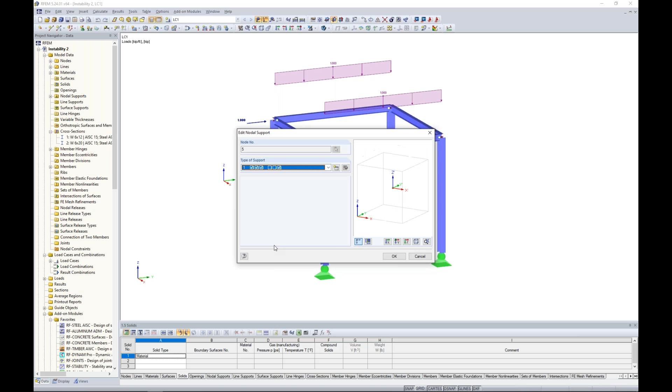You'll see down here at the bottom, we have these nodal supports. These pin type supports are defined here within this dialog box, and you can see we have 6 degrees of freedom, 3 in translation, 3 in rotation. Notice for this pin support, I restrained the translation according to the global X, Y, and Z axes, which we can see here. But I've also restrained the rotation about the global Z axis. So this just doesn't allow that column to freely rotate about its own axis for torsion, for example. So we restrain that here as well.

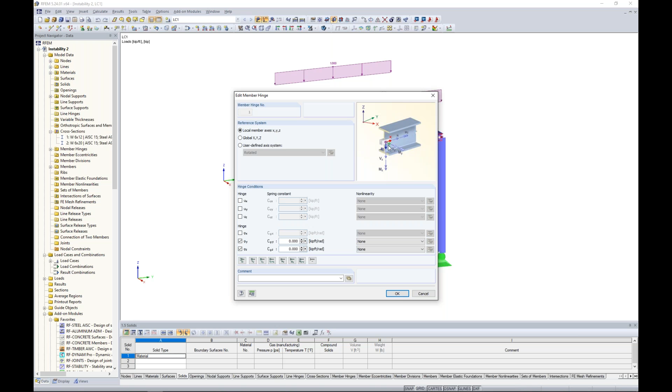Now, when I look at my beams at the top here, you'll notice that these are just typical beam type structures, but they are defined with a member hinge. As you'll notice here, I have released the rotation about the local Y and Z axes, denoted by lowercase X, Y, and Z, and we can relate it to this picture. But I have not released rotation about that local X axis, so that's going to prevent this member from freely rotating about its own axis with this pin member end release. Taking a look at our simple loads that we've applied: distributed loads up here on my front and rear beam, and then a couple of point loads to essentially apply a lateral load to this structure.

So this is under a particular load case here. And when we go to run this load case, according to just a simple linear analysis, we're presented here with our first instability.

I'd like to encourage you that when instabilities occur, especially within RFEM, to really read this text that's given to you here. We really do our best just to try and point you in the direction that the instability can be resolved. So when we read this, we see that the structure is unstable.

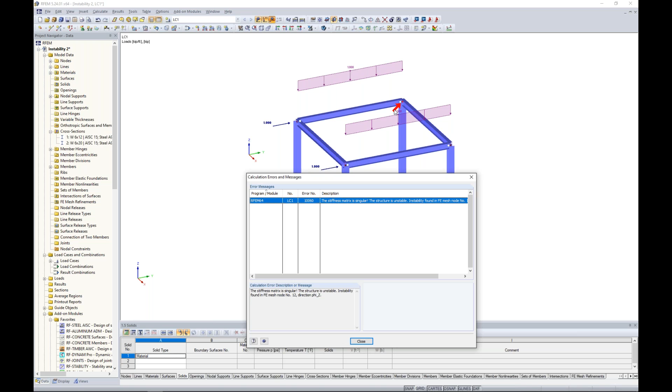The instability is found in FE mesh node number 12. And if I drag this down, we can see that red arrow kind of pointing to where that instability could potentially occur. Not always will this red arrow be helpful in troubleshooting exactly where the issue is, but often it can be used. And the instability is occurring in direction phi z, which is rotation about my global z axis.

So I can close out of this dialog box, and we might be thinking, okay, well, we've restrained these pinned supports down here to restrain the rotation about the global z-axis, so that couldn't be an issue. My member end releases are defined okay. So we might be thinking to ourselves, okay, well, maybe there's a modeling issue.

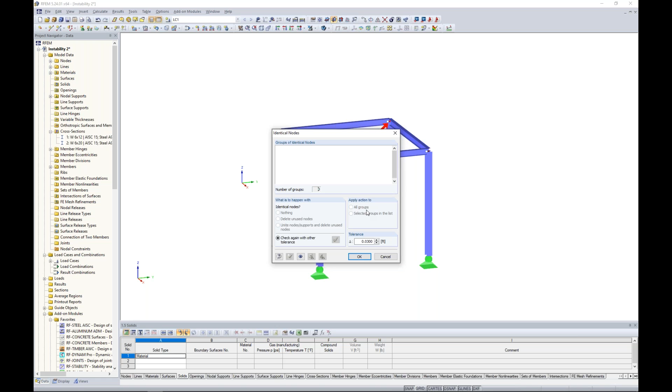Well, under tools, we can go to model check, and you'll notice we have a few features here to help us troubleshoot potential modeling issues such as identical nodes, overlapping members. If we take a look at identical nodes, we can set a tolerance and the program will actually list the groups of identical nodes here. But you can see for today's example, that's really not an issue.

So if I've exhausted all of my possibilities trying to troubleshoot just graphically looking at the model, this is where we want to utilize our add-on module RF stability. So over in the left, the project navigator, I can launch this add-on module. And what this allows me to do is to run a general eigenvalue analysis on this structure for general stability design.

I'm going to specify the lowest number of eigenvalues, that's just the default. Now the eigenvalue analysis is linear by default, but we also can run a nonlinear analysis if we choose to. But here's the problem. When we try and import the axial forces here from load case number 1, and we click calculate, the program gives us a warning saying that the results are not available. The reason why is because we cannot run a general static analysis in RFEM with this load case, so there's no way that we can run an eigenvalue analysis here.

Well, this is where we would want to activate this checkbox down at the bottom where we can determine the eigenvector for an unstable model so the cause of the instability can be checked graphically. And notice this is now grayed out, we're not utilizing this load case or combination.

So now when I click calculate, what you'll see here is we're presented with these results tables, eigenvectors by node and eigenvectors by member. But really what's most helpful is if we just immediately jump to the graphics view. These are going to be my results from RF stability, running that unstable model.

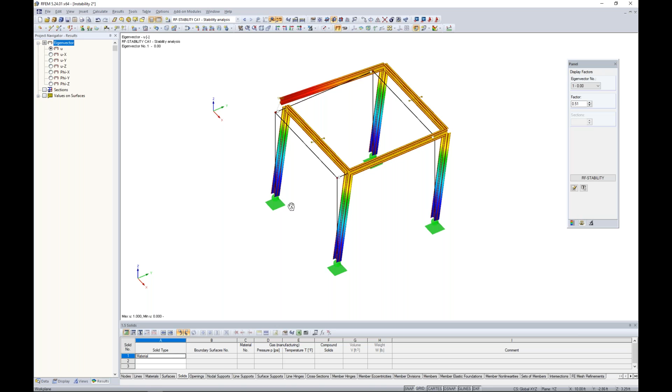Maybe I turn this to wireframe view here. And when I rotate the model around, I think we can clearly see what the issue is. And I can even show animation here of RF stability. We see that this member is not connected to the rest of the structure, so it's free to move about that global z-axis.

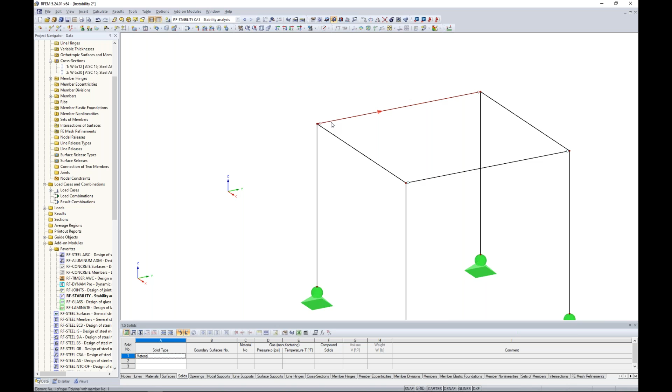So what we'll do is to turn off the results here. And if we zoom in quite a bit, well, sure enough, these two nodes aren't connected. And we might be asking ourselves, well, at what point is the program going to automatically mesh these two node points together? And that does exist within the model.

Under Calculate FE Mesh Settings, there's an epsilon value here. And this epsilon value, if we go to the full precision, is set at something pretty small, 0.003 feet. So this is the default setting, and you certainly can increase this, but you really need to be careful because if you set this to something too big, you're going to begin to merge nodes together during the calculation that really aren't meant to be merged.

So we'll leave this as default because clearly this distance is much greater than 0.003 feet, and all we need to do here is just grab this node and snap it to that column. Okay, so hopefully we've alleviated this instability. What we would do now is jump back to load case 1, remember with those same applied loads, and we'll begin to run the calculation.

So I run the calculation, and sure enough, I have another instability. Now the instability is found in FE mesh node number 83, and I can see the red arrow pointing here. This arrow's along the member length, so maybe not much can be going on there, so maybe it's not so helpful in this situation, but it is in the direction Y. That's the error message given to us - translation direction Y. So again, I've troubleshooted this model looking at it graphically, but I don't know the reason for this instability.

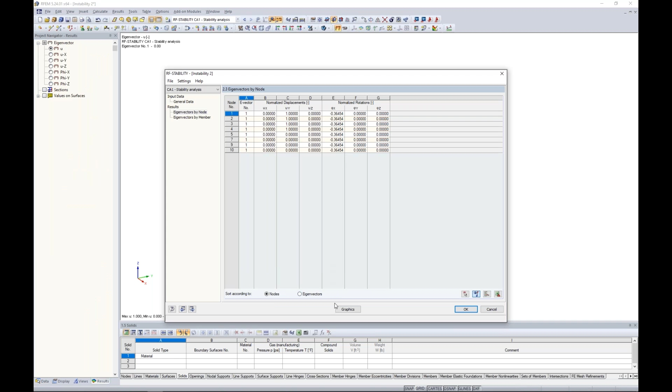So we jump back to RF Stability, and once again we have to keep this option checked because we are not able to solve this simple load case back in RFEM. So we calculate it again here, just like what we previously saw with that unconnected node. We take a look at our graphics, and realistically we can see what the issue is here.

We have all of these nodal pin supports defined down here at the bottom, and we have the moment release for our two beams at the top. So we have all these pin connections, but we have no lateral stability to this structure. You can see RF Stability is telling us clearly the entire structure is going to fail - we apply this lateral load, and it's just really going to hinge to the right side here. So how do we alleviate this?

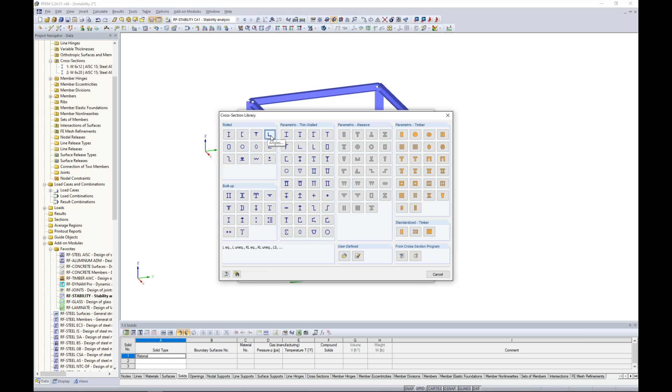Well, we would just need to add in some lateral bracing. So we can go in to draw a new single member, and we access our cross-section library, and we'll choose a single angle here. Now, utilizing my filters on the left, we can choose a single angle of 3.5 by 3.5 by 3/8 from the AISC.

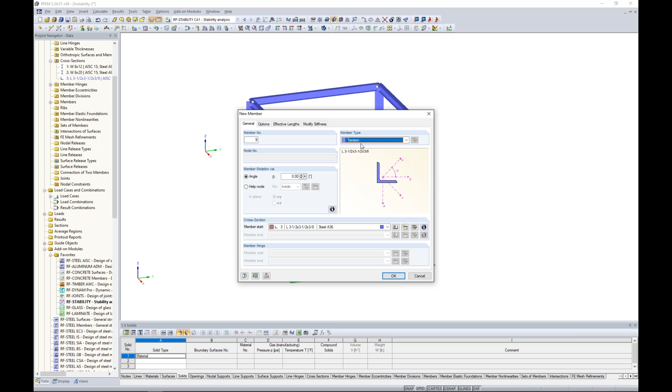Maybe we want to create a new material here, so we access our material library. Again, utilizing the filters on the left, we can choose steel A36 from the AISC standard. I click OK, and the member type here would be set to tension only. The benefit of this tension-only member is that when this member experiences compression, it will be completely taken out of the model, but in a subsequent iteration, if tension is reintroduced into the member, it will be reactivated. This is because RFEM is a nonlinear analysis program, so it can activate and deactivate this member all within the same calculation.

So I click OK, and what I'd like to do here is snap from the bottom point to the top point here. Now our hope is that we go back to this load case and once again try to run the calculation, and sure enough, we are presented here with our results. So hopefully this was helpful troubleshooting on basic instabilities, utilizing that add-on module RF Stability to help us.

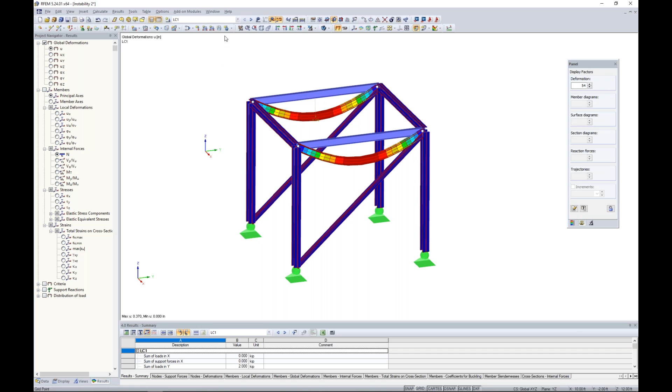So going to our next structure here, an example, definitely a more complex system. This is a previous structure I took from a webinar. If I change the display here, it will be quite clear - a timber structure, curved glulam members. I did the design according to the NDS standard, so you can certainly refer to our website or YouTube channel if you're interested in more of this.

But as we can see, typical glulam beam members here, and if I change my view here to the member type, I've defined truss elements in between these larger beams, and the truss just means that we're going to apply a moment end release at either end here. Then I have some tension-only members defined here with my X bracing, and these are just going to be cable elements. Then of course at the front and rear of the structure, we just have these small columns defined here.

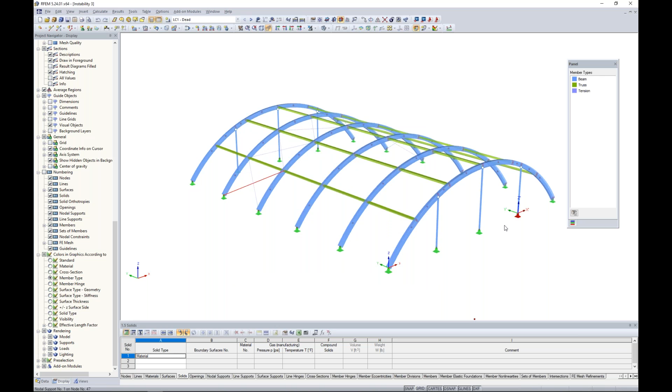So looking at my load cases, I have a dead load applied here - you can see uniform load applied across the top of my members. We have point loads applied to the top of the columns, and we also have a pre-stress applied to these cable elements. Looking at my next load case, we have a balanced snow load according to the ASCE 7, and then load case number 3, an unbalanced snow load.

Well, when I combine all of these into my load combination, you can see here load combination number 2 - it's combining those dead loads along with the balanced snow load. And I'd like to run this calculation here.

So we will run the calculation. I click OK, and the program will run through this nonlinear analysis, and we are presented with yet again another instability. But notice that my text looks a little bit different this time. It says the model is unstable, and the instability is found in FE mesh node number 94, so we can see exactly where that's pointing to.

But this time the program tells me it's in the direction phi x, rotation about the global x-axis, but the specified load is greater than the critical load. It goes on to tell us to utilize RF Stability to help troubleshoot. So how would I approach this?

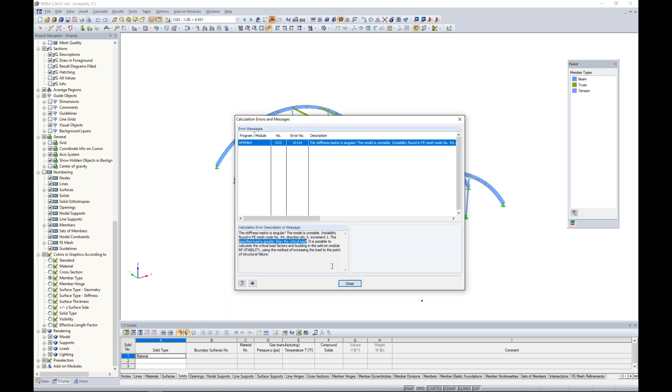When we're seeing issues related to critical loads, the first thing to do is jump up to our load combinations. By default, all load combinations are run according to a second order analysis. Let's just change this to a first order analysis, click OK, and try and rerun the calculation. Now, if you cannot run according to a first order analysis, the first thing we should be thinking is we probably have a modeling mistake somewhere.

But in this instance, the program runs okay. The other thing to check is, do we have any crazy deflections? If you see things flying off the page, there's probably some type of modeling error when the deflection according to a first order analysis is pretty large. But in our case, if I decrease this deformation factor and look at our total, it's 0.4 inches. So really nothing too wild going on here.

So why can we not solve according to a second order analysis? This is where we would jump to RF Stability once again. The difference here is that I no longer need to utilize this checkbox, but rather I can select load combination 2 from my dropdown, because we were able to get it to solve in RFEM, according to a first order analysis.

So we run a linear eigenvalue analysis, and what will be presented here is our critical load factors for our four different buckling modes. Dragging this down and taking a look at my four different eigenvalues, I think we can see clearly what the issue is: these slender columns at the front and rear of the structure.

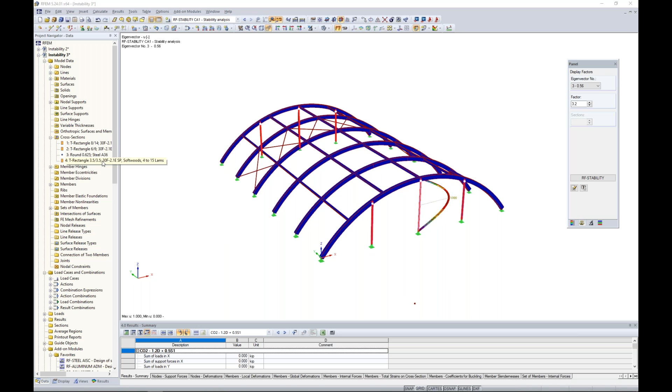So how do we remedy this? We can jump to our graphics view, and if we're curious to see those different buckling mode shapes in a little bit more detail, we can do so within our control panel. So I'm going to go back to the project navigator under my data tab to take a look at my cross sections. My slender columns here are very slender—I can double click on them and you can see they're only 3.5 inches by 3.5 inches.

So maybe we edit this, and instead we're going to use 5 inches by 5 inches. Same material, I don't need to make any modifications there. So now we're going to see slightly higher stiffness with these increased member sizes.

So then what we'd like to do is go back to our load combinations. Load combination number 2, we change this back to a second order analysis, because the hope is that this now solves according to not only a first order analysis, but a second order analysis. And sure enough, we are able to get results, and we can see that our total deformation is only 0.4 inches. So everything looks pretty good there.

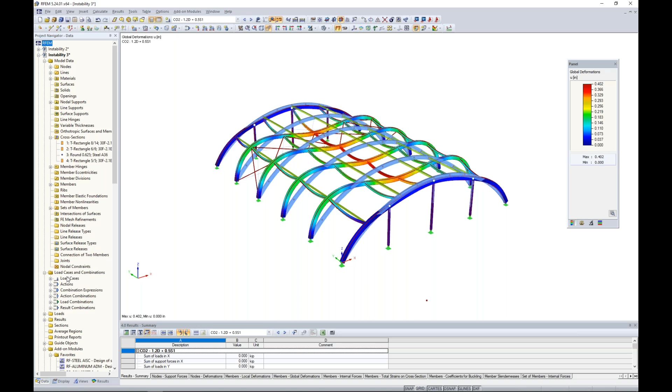And we might be curious to see, what does RF Stability look like once we've increased these member sizes? We're still importing load combination number 2, but remember now this is according to a second order analysis—that's fine because it solves back in RFEM. And here we're presented with critical load factors of 2.2.

So it looks like our initial buckling mode shapes for this structure would still be related to these slender columns, but now the structure can handle 220% of the loads from load combination 2 before we see any type of failure behavior related to buckling. Again, incredibly useful to utilize this add-on module RF Stability here.

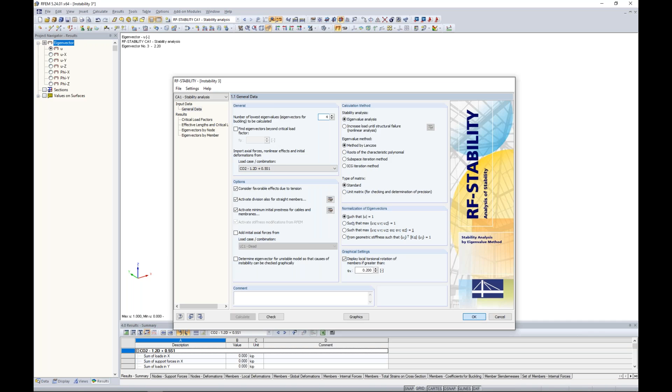Jumping to the last instability example, the first two examples were related to members and 1D elements such as beams and columns. But instabilities can also happen with surfaces. This was a previous model I took from a 2-part webinar series on plate and shell modeling within RFEM, and we have a typical tank type structure here.

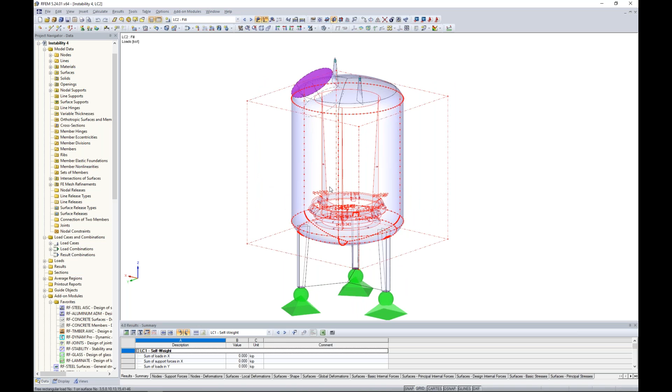Taking a look at my applied loads, our first load case is just self-weight, so no additional loads are shown here. Then we have our fill load, which is an internal load pushing out on the structure walls. And we have a wind load, which includes an uplift from the bottom and also a lateral load coming from the left with a suction force on the right-hand side.

So taking a look at my load combination where I've applied all three of these load cases together, we'd like to begin our first analysis. So I'm going to start the calculation here, and similar to what we've seen previously, we get an instability. Let's try and read this information to give us more information about what could possibly be going on.

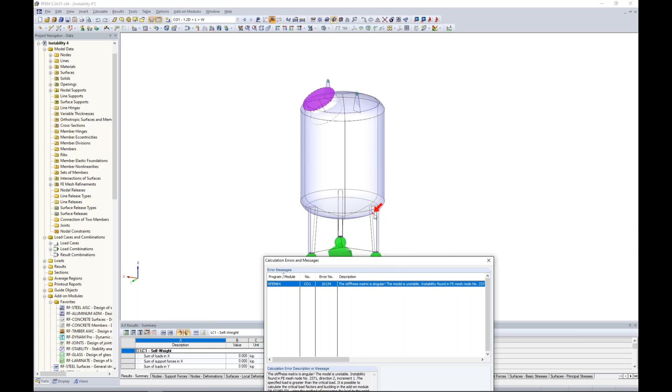So we have an instability in FE mesh node 2371. Looking at it, it looks to be at the top of this leg, the bottom of the actual body of the tank. This time it's in the Z direction. We'll have to look into that a little bit further, but we still get that same error that the specified load is greater than the critical load.

So once again, I'm going to take the exact same process that we just saw for our member elements, but it also can be applied to surfaces. We go into load cases and combinations, and under calculation parameters, instead of running according to a second order analysis, we change this to a first order analysis, and it's our hope now that we're able to see the calculation run.

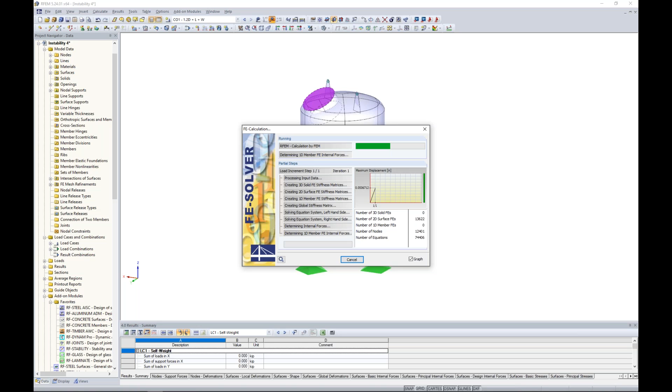And again, if we're not able to, then let's begin checking for duplicate members, duplicate nodes, unconnected nodes. Maybe we have the wrong units defined for our loads. So many different scenarios here. But in this particular case, the model solves great for a first order analysis.

If I decrease this deformation here, we see the total deformation is only 0.05 inches, so relatively nothing going on here.

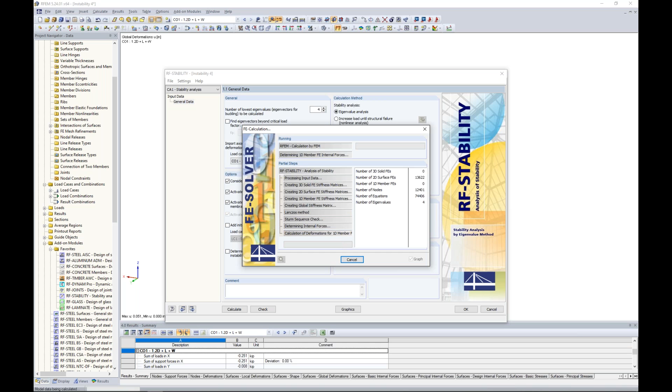So we go back to our trusted RF Stability, and we are going to import load combination number 1, because remember, we do have the ability to solve for that back in RFEM, so we do not need to utilize this option down at the bottom. We click calculate here, and notice this will take a split second longer than what we saw with our members, because we've introduced many more FE mesh points into the model than what we previously had with the members. But eventually we are presented with our results, including the critical load factor.

So when I move this down here, I think it's quite apparent what exactly the issue is. It looks to be buckling of these leg elements here, and again we're seeing values less than 1.0. So the program's telling us we can only apply 67% of the loads from load combination 1 before we're going to see a failure such as this one.

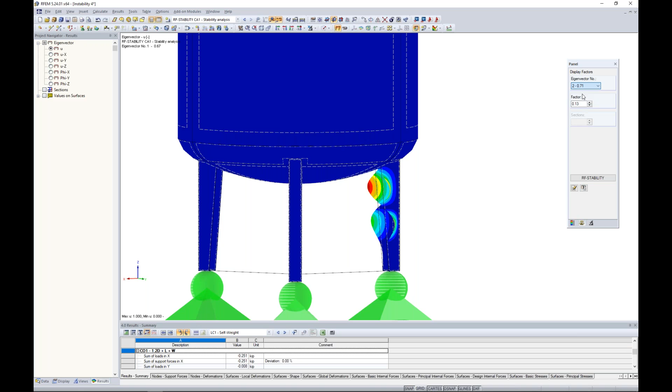So going back to the graphics view here, maybe we turn this to wireframe view to view this in a little bit more detail and more clearly. Again, we can scroll through to these different mode shapes here, and again they're all related to this leg element.

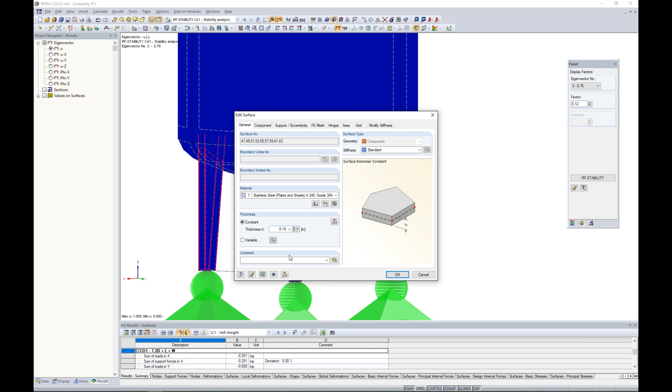So what I can do is highlight all of these elements, right click to edit the surface, and we'll notice that our thickness is only 0.04 inches. So this is probably not sufficient in this case. We definitely need to increase this. So let us try 0.14 inches instead. I click OK.

So again, we jump back to our load combination and change it back to a second order analysis, because it's our hope that this model will solve not only for first order but also for second order. And sure enough, we're presented with our results now. Just by increasing the thickness of those legs, we've alleviated the buckling issues that were taking place.

So again, RF Stability can be used not only for member elements, but really we can troubleshoot the stability of surface elements as well. We'll move on to the next topic. That's quite a bit with instabilities, but hopefully you learned something here. Definitely take a look at the text given in the error message and use RF Stability to overcome those issues.

So I mentioned in the PowerPoint a very common question: what size should my FE mesh be for my surface elements in order to give accurate results? That's a good question, and it's not easy to answer for every model because it really depends. You'll notice here I have 5 different surfaces, and they're actually all identical.

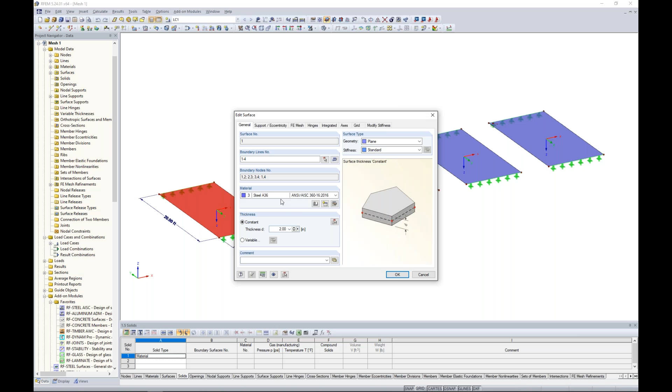If I double click on one of these, it's just steel A36 material, 2 inches thick. Looking at our support conditions, we have line supports defined on either side - a pin type support with restraint in translation on one side, and a roller type support on the other. For this initial load case, we just have a 0.1 distributed load, 0.1 kips per square foot on every surface.

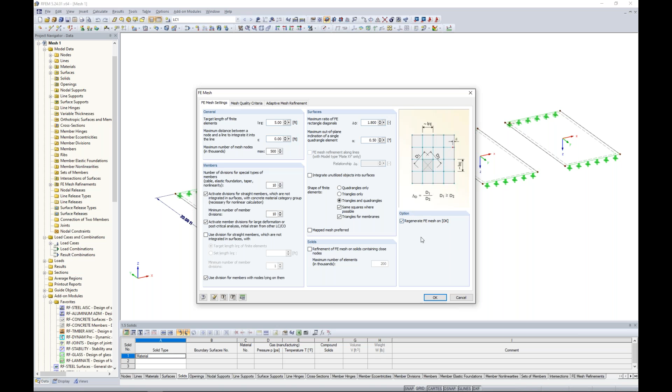So if we turn this to wireframe view, let's begin with our global FE mesh settings. Under Calculate, FE mesh settings, we can set the global mesh here, and you can see I've set mine to 5 feet. When I click regenerate FE mesh and click OK, let's take a look at our first surface here.

This is going to abide by that global FE mesh of 5 feet, and you'll notice a very coarse mesh - we only have 2 elements across the width. I can tell you this is definitely not ideal. The only place we're getting results here within the program after we run the analysis is at every FE mesh point. Definitely not adequate, much too coarse.

As we move on down the line, you'll notice I've added FE mesh refinements. You can add an FE mesh refinement about any element by highlighting it, right clicking, and selecting FE mesh refinement. In this case, I set the refinement to 2.5 feet, about half of the adjacent surface. I continued by adding an additional refinement of 1 foot. My fourth surface has an even smaller refinement, 0.25, about 3 inches. And finally, we have a very refined FE mesh at 0.1 feet, a little over 1 inch.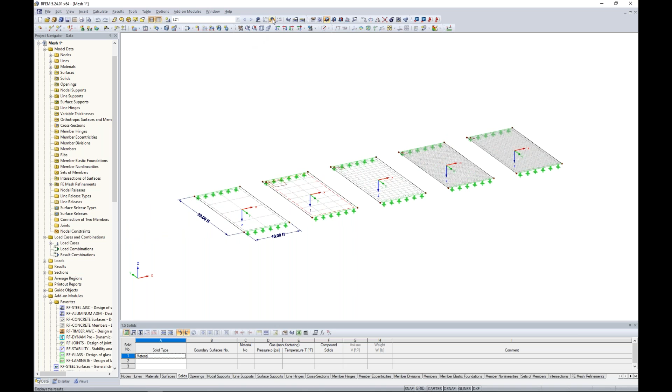So it might be interesting for us to compare results for these distributed loads. We're going to run the analysis here. Let's take a look at, I'll turn off my sections here, the initial deformation. Just primarily looking at it, nothing too drastically different here, though I'm sure we'd get some different values. But I think the biggest telling difference is to take a look at the internal forces.

Let's begin with our MX forces. I've set my contours according to every FE element, and you can see that bending along the local y-axis of the surface, in the length direction, is drastically different as we move down this line. This coarse mesh is much too big - we're not going to gain accurate results here. When we look at the MY forces, same concept - comparison of this first surface versus the last couple is very different.

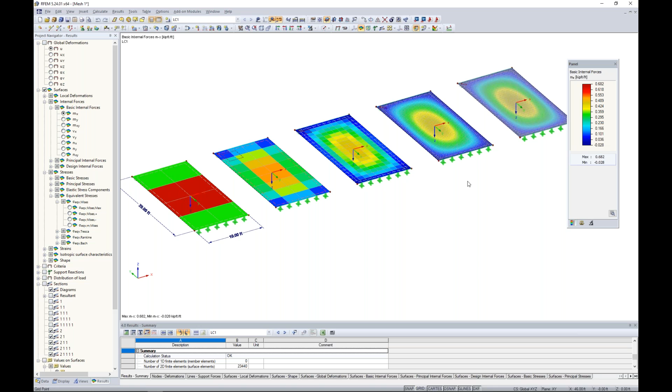Now we can compare section cuts as well. What I've done - I'll turn on these sections and turn off my ISO band so it's easier to see - is made a cut right down the center of these surfaces. Under my display tab, let me also turn on how those cuts were made. I'm currently looking at the MY force, again along the length, and you can see how the diagram of this section cut changes.

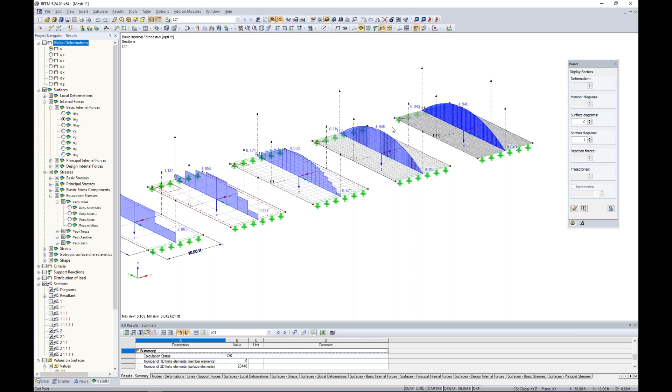For example, these two elements here, this one has about 1/3 the FE mesh on the left than it does on the right, but yet our results are only changing by 0.001. So it's kind of this happy medium, finding the right balance of when we refine our FE mesh to gain accurate results, but not too much so that our calculation time increases significantly because we've added all these additional elements.

Now we can also view the same concept with our MX forces, and I'll turn on my diagrams in the other direction of my section cuts through the surface. Same thing. You can see that this diagram here is definitely not what we'd like to see, but as we begin to move down the line, we're seeing a little bit more realistic behavior here.

But again, take a look at the max bending forces: 0.479 kip feet, 0.472, 0.47. So very little difference when we're looking at some of these surfaces towards the end here with an increase in FE mesh. So I would argue that maybe the second to the last, or possibly even the third to the last, depending on your structure, is adequate for gaining accurate results while not waiting forever for your solution to run.

Now, how do we check this for our own structure? Well, we can just manually refine the mesh, run the calculation, take a look at our results. Let's rerun the calculation with a more refined mesh. Are our results drastically changing? Yes. Well, then we need to continue refining until we get to a point where the results are not changing much, and then we can probably move forward with our static analysis.

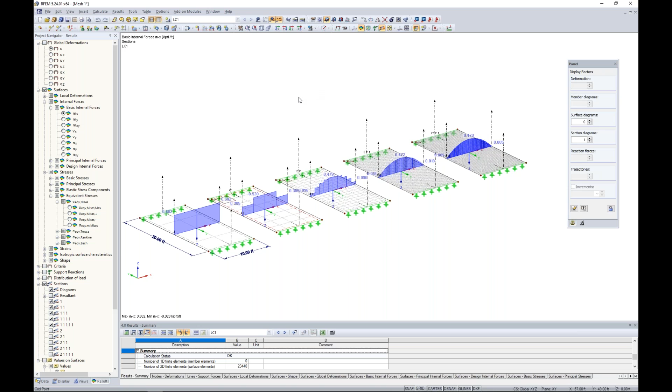So to put this into practice for a real life structure, we'll jump to our next example. This is the FEA model of a connection. We have a beam splice here with two HSS members, and this is utilizing a contact solid. A contact solid allows these two plates to fail in tension where the bolts will take over, but yet in compression we'll see full force transmission.

But definitely a much smaller scale here in terms of our FE mesh. So turning this to wireframe view, if we go to calculate FE mesh settings, typically for a new model, the default mesh size is 1 foot or 12 inches. So if we move forward with this 12 inches and regenerate our FE mesh here, I think we can see that this is absolutely not correct. There are some portions of this HSS sidewall that don't even have a single FE mesh point across the width. So this is definitely telling us that we really need to refine this FE mesh to get multiple elements across this width in order to get accurate results.

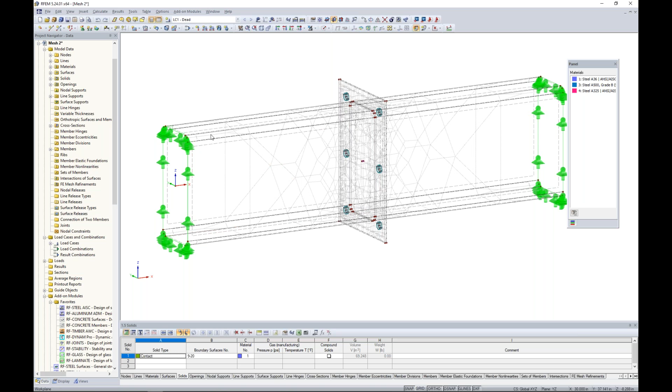So under calculate FE mesh settings, let's change this instead to 1 inch, and we'll regenerate the FE mesh, and I click OK. Now you can see that this looks incredibly better. Now, the program is still intelligent enough, as you saw with the 1 foot mesh, that it will still tie together the nodes and the line elements despite the large FE mesh. So we don't need to take care of any of that manually, but we definitely needed to refine the FE mesh for the surfaces out here.

Now, there may be situations where we want to further refine the FE mesh, and again we can utilize those FE mesh refinements. We just right click on this line element, and we can add that FE mesh refinement here, so you can manually do that. Now, there is a helpful tool within the program that essentially will do all of this manual work for us when it comes to the FE mesh. So under calculate FE mesh settings, you'll see here adaptive mesh refinement. Well, what does this tool do?

We can turn it on here and select any load case or combination we'd like from our dropdown. In my case, I only have one load case defined. We set an average error tolerance here, which I'll just leave at 0.1%.

The program will start with a pretty coarse mesh, as you can see on the right. It will run the analysis, then refine the FE mesh, and compare the results from the previous iteration. It continues to do this until the results aren't changing within 0.1%. So it's actually doing what I described earlier for manual refinement - taking a look at your results - but this does it automatically for us.

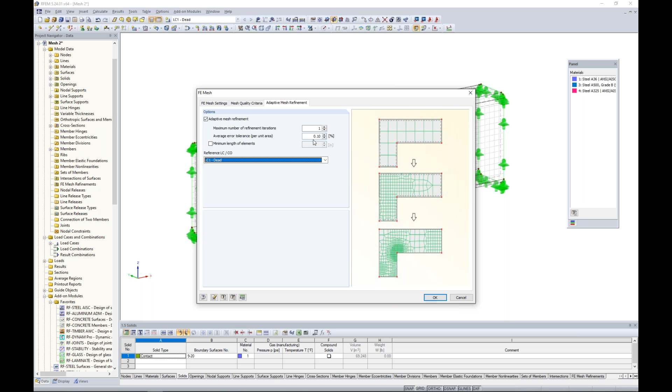So when I click OK and click calculate, generate FE mesh, it looks like it's almost running a calculation, but it's actually determining the FE mesh for us.

Once this is done calculating, what will be presented is the refined FE mesh. You can see a larger FE mesh at some of these HSS surfaces, but when it comes to the plate around our bolt openings, or curved portions closer to our line support, we'll see a more refined mesh. This is going to be the ideal mesh to continue moving forward with our static analysis.

So again, you can either manually set that global mesh and add in your own FE mesh refinements if you'd like more control, or you can utilize this adaptive mesh refinement within the program to have the automatic mesh set for you.

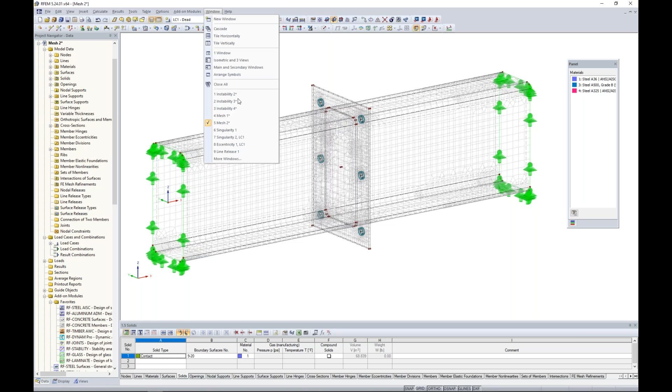This brings us to our next topic, also related to surfaces and somewhat to FE mesh: singularities. Singularities really happen in every FEA program. We experience these high peak stresses and internal forces that just aren't going to occur in real life, but they're inevitable in FEA software. This will be a good example of why they occur.

Looking at this concrete structure on a much larger scale, we have a 2D surface for our slab - 4,000 PSI concrete, with thickness set at 10 inches. We also have columns framing into this slab from underneath, and these columns are 15 inches by 15 inches. But the problem is when we turn this to wireframe view, and this is the case with any FEA software, members are represented by this one-dimensional element.

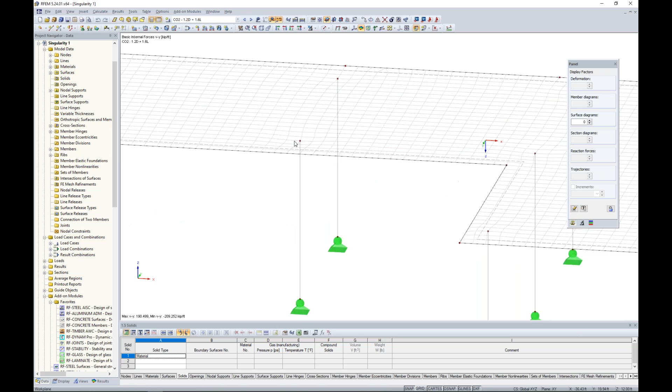And it's framing into this two-dimensional surface at this single point here. So all of the force transfer is taking place at this single FE mesh point, and this is a result of why we get singularities where we don't have real load distribution.

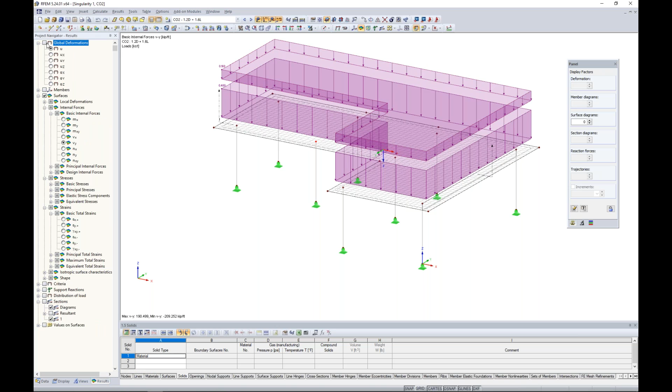For this example, I've applied a couple of gravity loads here for dead load and live load. If we run the analysis, which I've already done in this case, and take a look at our results, we'll turn on our ISO bands and turn off our loads. Okay, the initial deflection - nothing too strange here.

But let's take a look at the internal forces for our slab element. We'll turn this on and look at MX. Initially, MX looks okay - obviously we're seeing some positive bending moment between these column supports. But then there's the case over the columns where we're seeing extremely high negative bending moments.

And of course there will still be some negative bending, but these look pretty high at these locations. MY shows the same concept - positive bending between where these columns are spanning, but very high negative bending moments where it frames into these single 1D member elements. And even more so can be said about the shear forces.

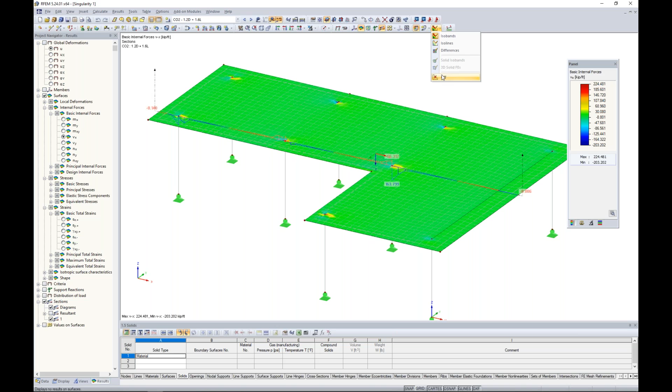We fully expect shear forces to be higher at these column locations, but I've also made a section cut through my structure that I'll turn on, and maybe turn off my ISO bands. If we look at this section cut, you'll see these shear forces are very high - from negative 66 kips up to 163 kips, all at this single point location. So there's got to be a better way to distribute the forces over that entire portion where the column frames in, because in real life it's not represented by this single line element.

This is where we'd like to add what's called an average region. Under the project navigator, we can find average regions listed here, and I can right click and choose new average region. It's exactly as it sounds: we're going to average out the internal forces over a set width and length, and this will be presented to us so that we can overcome these high singularity forces.

One other thing I forgot before we do this: before you place in those average regions, let's think about the FE mesh. I'd also like to refine the FE mesh around these singularity locations. I think it's best to isolate these high peak forces into an even smaller area, and we do so with an FE mesh refinement.

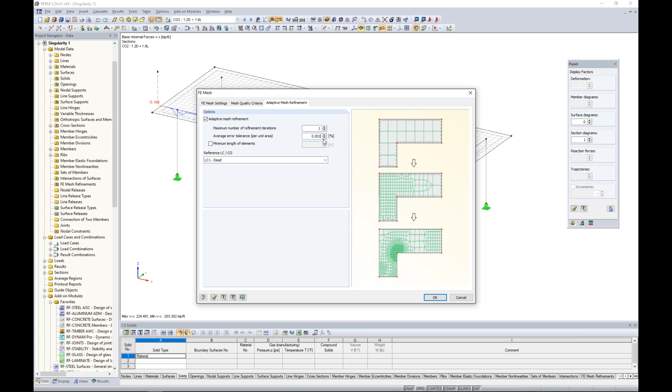We can right click on that node and add in a new FE mesh refinement by creating a new refinement type. But remember, we can also utilize, under Calculate, FE Mesh Settings, this adaptive mesh refinement once again, just to get the ideal mesh refinement. In this case, I'm going to set this percentage value much lower so I can see some refinements about these columns and such.

So under Calculate, generate FE mesh. Let's take a look here. Here's the initial coarse mesh in the background, and eventually we have these nice FE mesh refinements, especially around our reentrant corners and our columns.

Now let's jump back to the average region. We right click on the average region to create a new definition type. As I was saying, it's going to average out these internal forces over a set dimension. Now we can choose the surface we'd like to apply it to, so it'll just be surface number 1, only one surface here.

I'm going to place the average region at the top of this column, so I graphically selected it. We choose the shape, so it can be a rectangle, and we choose the dimensions. Now, what's the correct dimension for an average region? This all depends on your model - it's up to the user's discretion on how big to set this average region.

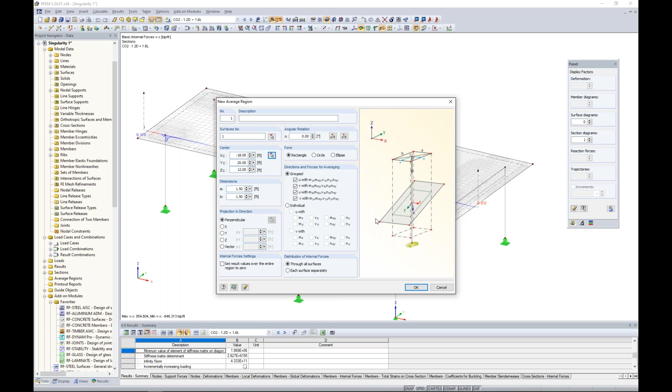So now when I click OK, you'll notice that immediately the high peak force is gone because we're averaging it out over this entire area shown with that blue symbol. I can take this average region, hold down my control key, drag and drop it to my next column location, and you'll notice that peak is now gone. Let's continue with this third column, and now we're seeing those high peak stresses are eliminated.

Not entirely, because we do want to see some shear, of course, at these locations. If we right click along this section cut to view our results diagram, this will give us a little more detail along the length here. I'm going to turn on MX, MY, VX, VY, and we can clearly see where that average region was applied - it's flattened out along these internal force diagrams.

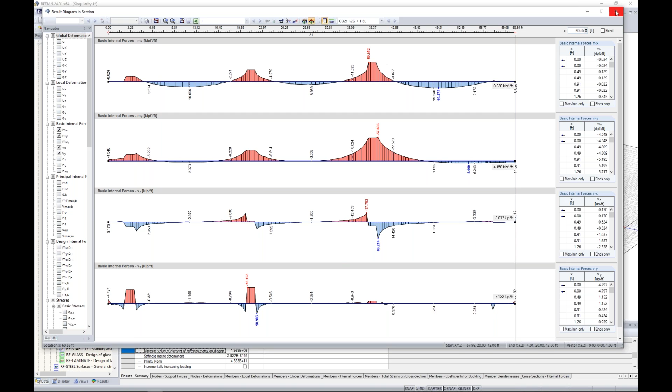So average regions can definitely be helpful in overcoming these singularities. They can also be applied in the design add-on modules such as RF Concrete Surfaces, where we design the reinforcement for this element.

Well, these average regions can also be considered directly within the add-on modules. So moving on to our next example, also to deal with singularities, there are situations where maybe average regions don't help in certain scenarios.

For this particular case, we have a shear wall or gravity loading wall with 4,000 psi concrete, 6 inches thick. There's a simple gravity load applied, a distributed load at the top, and I've applied a couple columns framing into the bottom. These columns are quite compact, 2 feet by 6 inches.

But regardless of the dimensions of this column, when we turn this to wireframe view, we'll still see that these members are represented by single line elements framing into this one tiny FE mesh point.

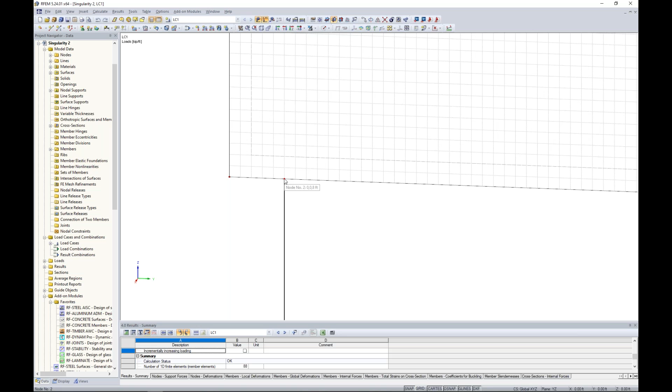So when we take a look at the results from this first load type, and we're currently viewing the deformations, we zoom in to look at them. Well, this definitely is not ideal. We know that this column has a pretty wide width of almost 2 feet, so we wouldn't expect deflection such as this.

Then if we take a look at our internal forces, let's look at NY forces, compression and tension in this wall. We have extremely high peak forces here, those singularities. We're seeing compression here at 454 kips. This is definitely not ideal.

So how can we see better load distribution over this area? This would be a situation where average regions could be helpful, but I think there's a better approach here, and that'd be to apply a rigid element for load distribution.

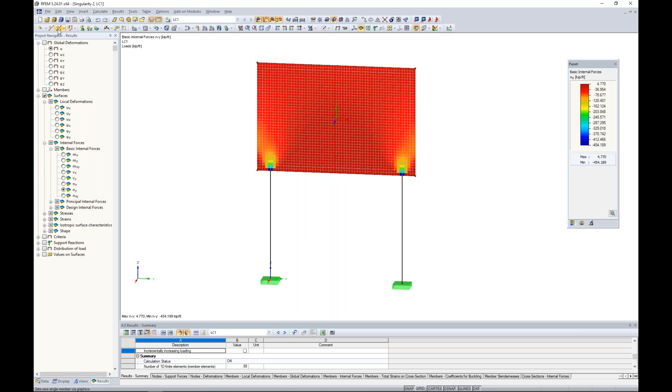So we'll go into draw a new member. Under the member type, this is where we're going to choose rigid. With a rigid element, you'll notice you can't choose a cross section or material because it's just going to be a very, very high stiffness element. So we'll click OK. It's asking me to clear my results.

I'm going to zoom in here, and I am going to snap from the top of my column 1 foot to the left, and snap from the center of the column 1 foot to the right. So there's that rigid element. This is going to represent the full 2 foot width of that column.

Remember, if we turn this to a rendered view, this is kind of what we're helping here with the load distribution. I'm going to take these 2 rigid elements, hold down my control key, and after they are selected, I can drag and drop and copy them to the other side.

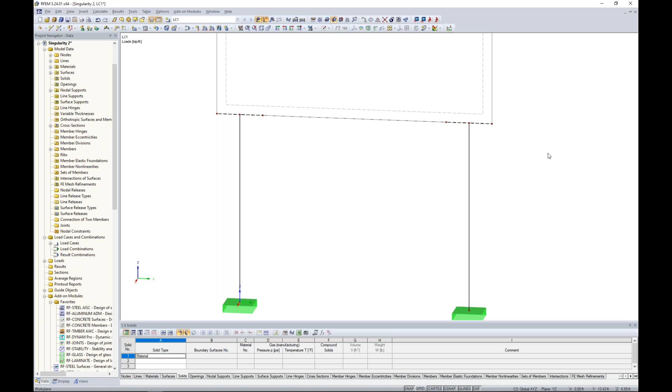So let us rerun this same calculation just to see how our results will vary. When we take a look at our global deformations, this is definitely something that looks much better. We kind of have a straight deformation line at the top of the column due to those rigid links, but we're still going to see downward deflection spanning between the columns.

Let's jump back to our internal forces, in particular those tension and compression forces. You can see now we're seeing high tension forces at the bottom here, and some compression forces more towards the top. This is exactly what we'd expect. Previously, we had those singularity points that were kind of overtaking all of the internal forces.

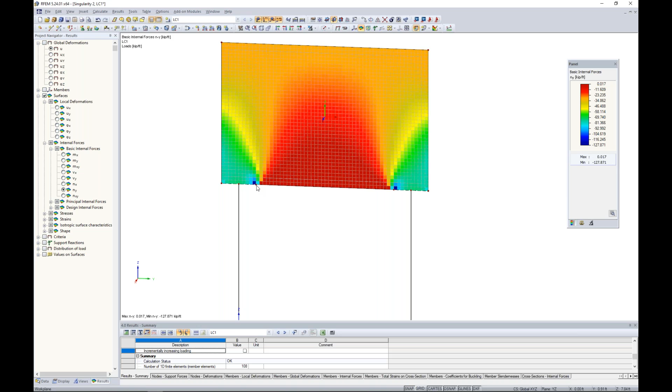Now, we might still have a slight singularity here where this rigid link is ending, and this could be where we use an average region to help distribute that load a little bit further. But all in all, this is going to give us much better results than what we saw previously without those rigid elements.

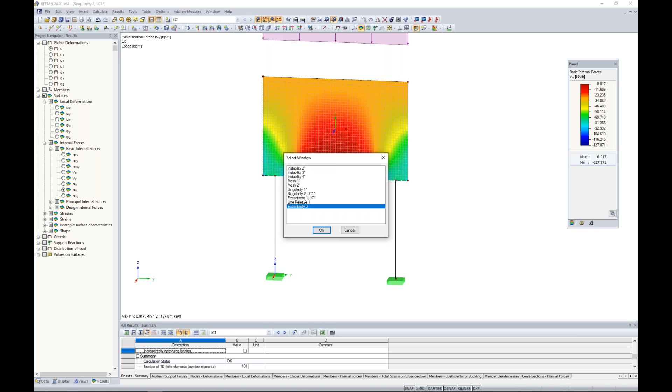Okay, so moving on to our second to last topic, I want to take a look at eccentricities, and we'll jump to this model here. Very simple application, simply supported members, but I want to take a little bit of time to discuss member eccentricities, member offsets, because this is a topic that comes up over and over again.

So it must be remembered that finite element analysis software is not a BIM software. BIM, we're using to ultimately create these drawings to maybe give to the contractor to show exactly how members are framing into each other.

When we're talking about finite element analysis software, this is truly what it sounds like—it's for the analysis, for the engineer. So it's not our goal to make sure that every element is lining up perfectly with every other adjacent element.

I'd like to take a minute to talk about when eccentricities can be helpful, but also when they can really cause unwanted behavior within the program.

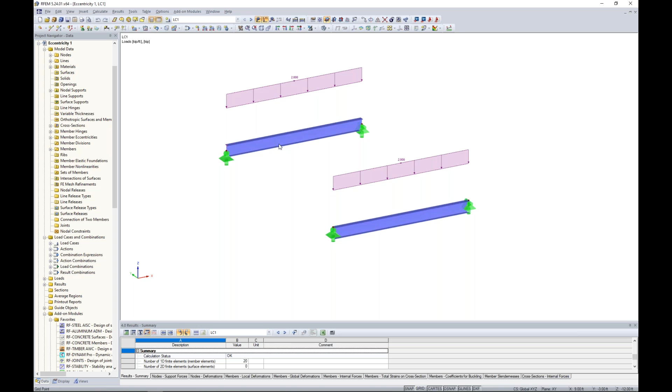Starting off with the simple application here, a distributed load over these simply supported members. You'll notice that first element here—I turned this to wireframe view—everything's just framing into it at the center line. Well, the second element here, let me turn off my nodal supports.

What you'll see is that I've actually added in an eccentricity. Under the options tab, I manually set this to drop the top of steel down to where that nodal support is, and I manually set that here in the global Z direction.

So what you'll notice when I turn this into wireframe view is that we have these rigid elements here that we've kind of dropped down at those nodal supports. Now, we're not truly adding in rigid links along the member length—it's actually taken into account with the stiffness matrix, but an easy way to think of it is to imagine these rigid elements dropping this member down all along the length.

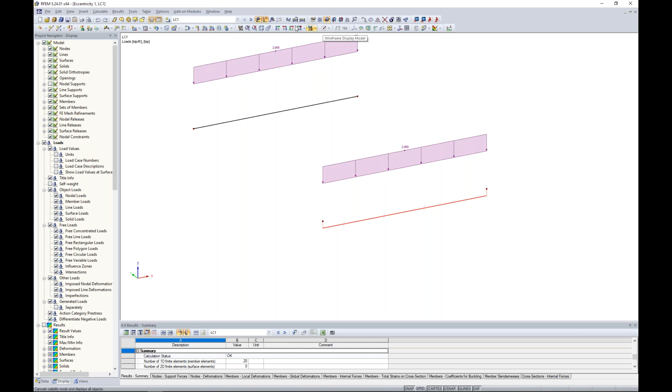So we might think that's harmless, and we go to run our analysis here, both with the same distributed loads. I'd like to take a look at the results.

We'll immediately start off with the moment diagram. So for a simply supported beam, we take a look at our first example here—this is exactly as we'd expect for our moment diagram, peak moment right here at the center. But as we transition into those nodal supports, which are pin roller type situations, we expect no moment.

Well, by introducing this eccentricity here to drop the top of steel down to where our nodal support is, we now have a negative bending moment here due to those rigid elements at the end. Our peak moment here in the center is almost half of what we're seeing here with our original beam element.

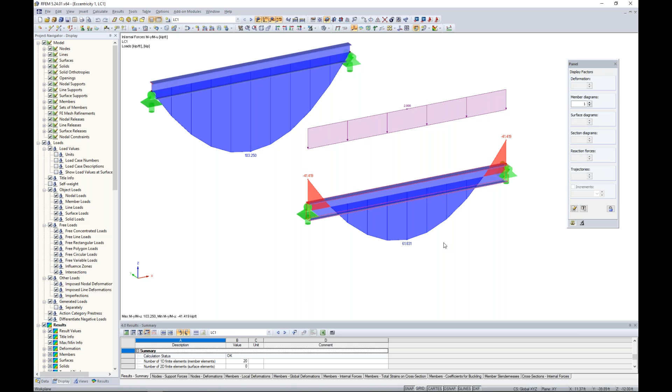So definitely not ideal when, again, we're looking at this render view to drop that element down here, because we're going to get these unwanted moments at the ends—we're now getting the full moment here at midspan. So this is definitely a scenario where you really need to think to yourself, okay, why am I dropping this element down with this eccentricity? Is it really necessary with this finite element software?

Moving on to our next example right next to it, we'll take a look at a different type of system. This is just going to be a simple 2D frame here, and you can see I've restrained the top here out of plane—chevron bracing here with some single angles. Turning this to a wireframe view, my first example, everything's framing in nicely at the center lines just by default.

Well, when I take a look at my example here behind it, what I've done is I said to myself—and I'll turn off those nodal supports here—I want to drop the top of this member down to the top of the column. So we've added in that eccentricity here, which you can see under my eccentricity options.

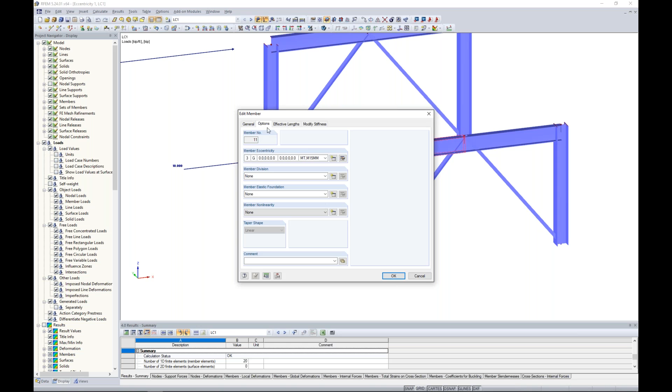I took advantage of this relative offset. I took the top of the member and offset it from member number 15, which is the column. The advantage of using these relative offsets is that when the member size changes, if I needed to do so, the eccentricity is automatically updated, so I don't need to manually adjust those.

But point being, we could have even taken this a step further to remove the eccentricity from the axial offset here as well. But when we turn this to wireframe view, we can see this member drop down below here again with those rigid type elements, again being taken into consideration with the stiffness matrix. A lateral load applied here.

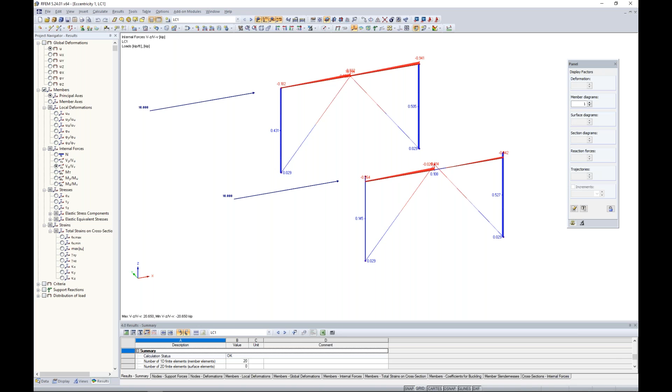So we run this analysis, and when we take a look at our results, pretty much everything looks to be fairly the same. We're taking a look at our axial forces, and maybe we take a look at our shear forces as well.

Taking a look at the bending moment, the strong axis bending moment, let me create a visibility for just these two upper beams here. You'll notice the drastic difference with the strong axis bending.

In my first example, we transition from a positive moment, zero moment at midspan, into a negative moment. Quite a different story when we take into consideration that eccentricity. We have a huge jump in the moment where those chevron braces are framing in, and we know this really just is not ideal behavior. So this is definitely a scenario where it must be considered: do we really need to consider these member eccentricities and offsets, or is it doing us more harm than good?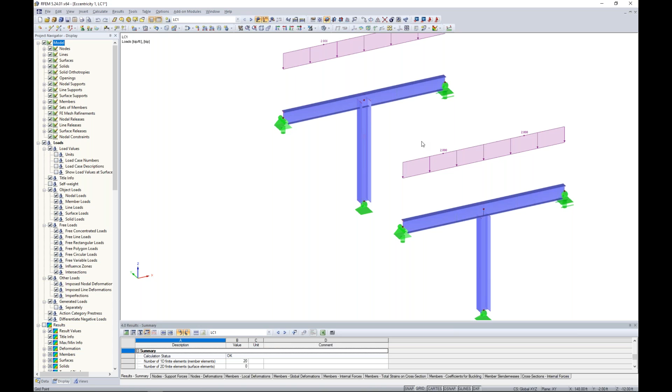Moving on to our final example in this particular model, we'll cancel our visibility mode. Let me once again turn on my nodal supports. We'll move over to the right here, to a T-type frame. With this system, let's assume we have these beams framing over the top of this column. My first example in wireframe view, everything's framing in at the center line here, just default settings, no eccentricities.

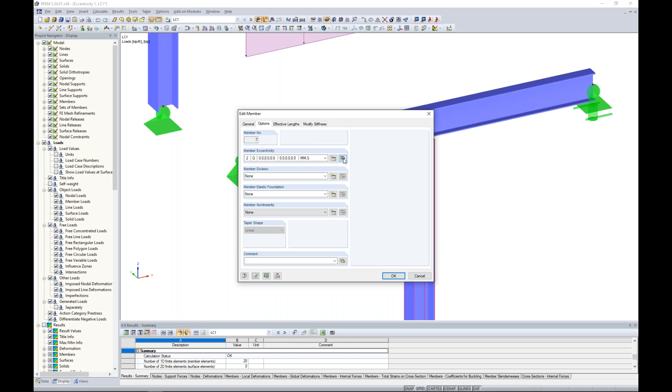But when I look at my example here, what I've assumed is that if I know my beam is running along the top of this column, I'm going to offset this column so it frames into the bottom of the member. I did so under my eccentricity options, using this option at the bottom where I can apply an axial offset from the adjoining member.

So I've applied that, and you can see here we have a small link that drops that member down below. Let's once again take a look at the examples, turn this to wireframe view, and turn off our loads. Same loads apply to either scenario. And we take a look at the bending moment.

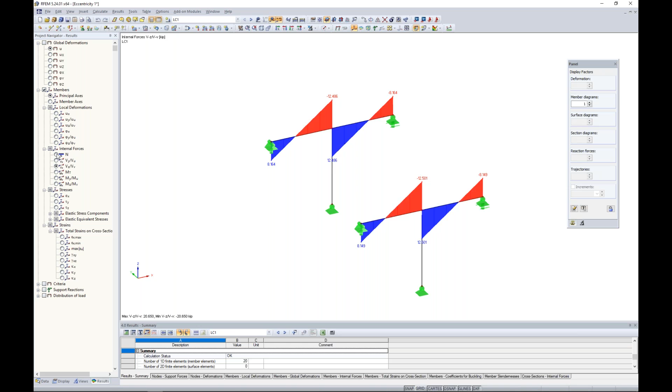Now, only 0.1 kip-feet of difference here between my model on the left and my model out in front on the right. When we take a look at shear, again about 0.02 kips difference between the first and second examples. Maybe we're interested in seeing our axial forces within this column. If we look at the axial force at the bottom, 26.05 versus 26.01, so 0.04 kips of difference.

So my point being here is that we perhaps have a huge model, and we've gone through and applied all these eccentricities for our columns to drop that down to the bottom of the beams framing up above it, with absolutely no influence, or very little influence, on our results that really don't make it worthwhile. So maybe not detrimental in terms of additional forces, but really no difference. There's no reason to apply these offsets in these situations.

Again, this isn't a BIM software, we're just truly here to do the analysis. Now the exception - well, we'll get into another exception in just a minute - but considering connection design, you need to consider offsets and eccentricities when a beam is framing into the face of a column. That's clear. But when we're looking at overall member design, in so many scenarios it's just really not necessary.

So jumping into an additional example here, we'll go to the second example. Now there are scenarios where we do need to consider eccentricities for the full structural system, and a perfect example of this is composite behavior. You'll notice my initial example and system up here, I have a concrete deck, I have also my steel member, and everything just modeled with the center line.

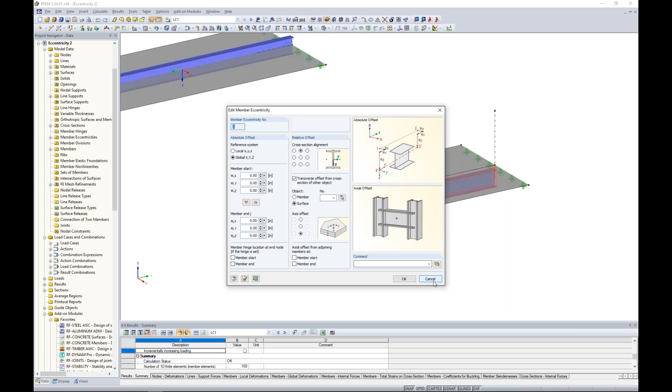So with composite behavior, comparing one system here to the other, let's take a look at our results. We have a distributed area load here, about 2 kips per square foot.

We run our analysis and take a look initially at our deflections. The first thing to notice, if I turn on my sections, is that we have significantly greater deflection with this system where the elements are modeled at their center line, and slightly less deflection with the true offset of this member applied.

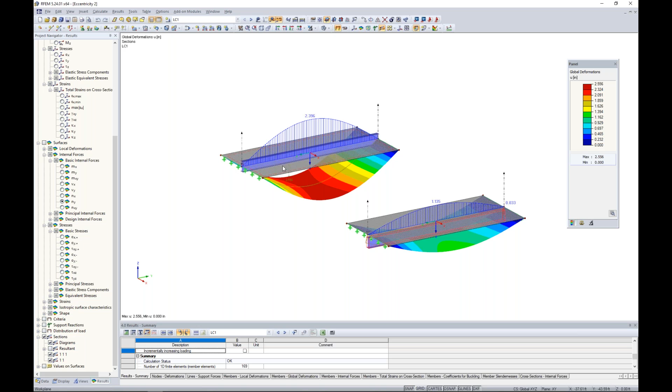Now, the entire purpose of composite behavior is so that the slab element takes the compression forces and the beam element takes the tension forces. So if we turn on our surfaces and activate the NY forces, this represents the tension and compression forces along the length in the Y direction of the surface. Let me create my user-defined visibility.

There's absolutely no compression going on with this first example. If we compare that to our second example down here, let's create a user-defined visibility, setting this back to default. You'll notice we have significant compression, 80 kips here towards the mid-span.

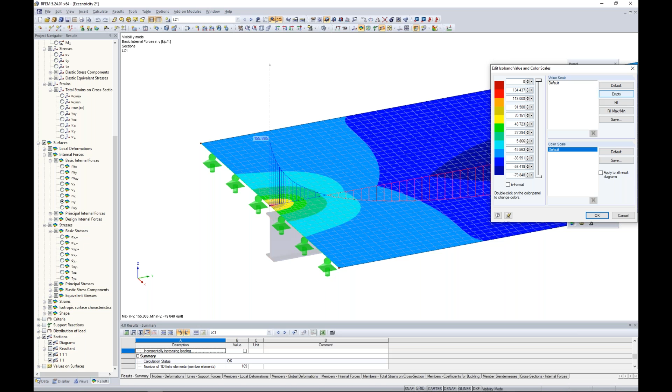This transitions into some high tension forces, which I'd say could probably be attributed to a singularity. We could use an average region or maybe rigid links to take care of that. In our control panel, let's take out tension and adjust this to look only at the compression forces.

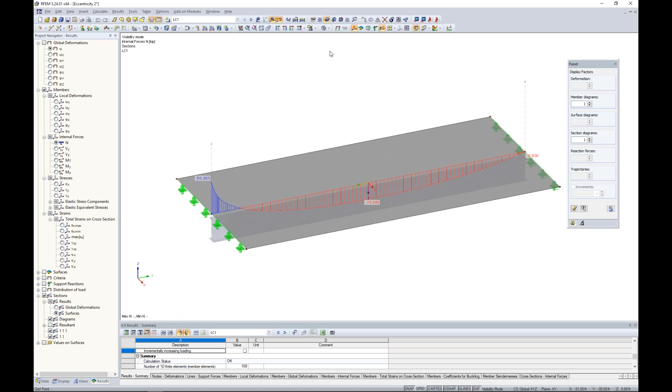It's really as we'd expect: we want this slab element to take those compression forces from the applied area load. If we turn off our surfaces and take a look at our members, canceling my visibility and turning off my sections, what we're most interested in is the axial force of the member.

Looking at my system up here, I don't have a single axial load within this member at all, so it's not taking any of the tension. Well, if I look here, we have a very high tension force, 571 kips. That's exactly the behavior we'd like to expect.

So there are definitely scenarios where we would want to apply these member eccentricities and offsets, and one clear example of this is with composite behavior design. So let's jump to our last example today, which will be somewhat related to this composite behavior.

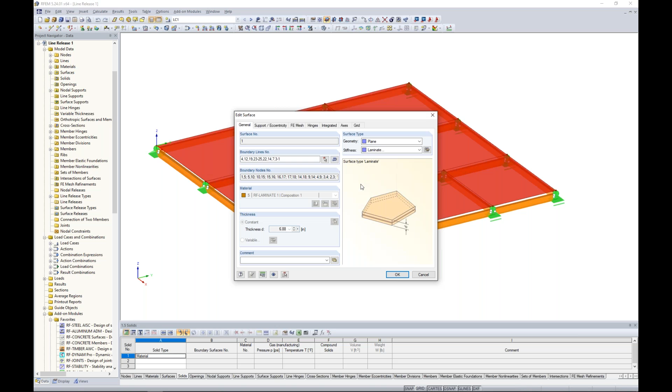This time we have a CLT deck, cross-laminated timber. I've utilized my add-on module RF-LAMINATE to define the various layers within this floor. Below it, I have my glulam members, and I've applied this eccentricity because I want this deck sitting on top of these glulam members.

You can see on either end I've also applied some member hinges—I've released torsion on one side, and released moment on both sides. What you'll notice is that we're ultimately trying to gain composite behavior design between these two elements. We have an applied load of 0.5 kips per square foot, and we run our analysis.

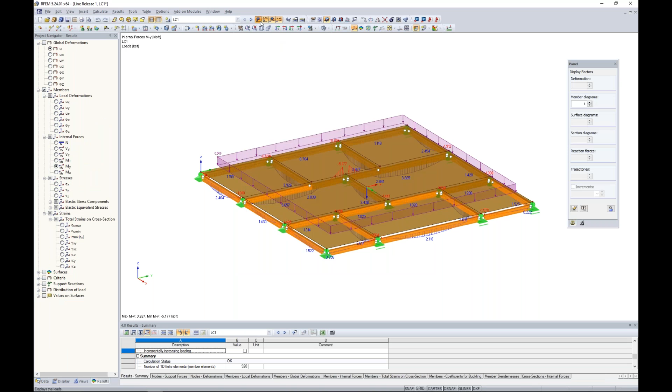So what we want to do is quickly run this particular load case to take a look at our internal forces of our members. When I take a look at torsion, for example, we're seeing some pretty high torsion forces within the structure, and this definitely is not ideal.

Typically, when we are connecting the CLT floor to the beams below it, we're going to use a screw type connection, and the screw is going to release the moment so that we're not so concerned with torsion in our members. The other thing is if we take a look at the bending moment...

Well, these are supposed to be simply supported member elements here with pin releases, and we have extremely high negative bending at one end. Now it eventually goes back to zero, but we definitely don't want to see such high negative bending either.

Well, the problem is that we have defined this composite type behavior and everything is rigidly connected, when in reality we want partially composite behavior because of the connection between the CLT floor and the glulam member. So how can we take that into consideration?

Well, what we're going to utilize is what's called a line release. So over in my project navigator, I can right click here and choose new graphically. The first thing to do is define my line release type, and you'll see here we have 4 degrees of freedom. The first thing I'm going to do is completely release that rotation about the line's local x-axis.

So it must be clear that these x, y, and z axes refer to the line element itself, not the member and not the surface. But I'm going to release that torsion along that line x-axis.

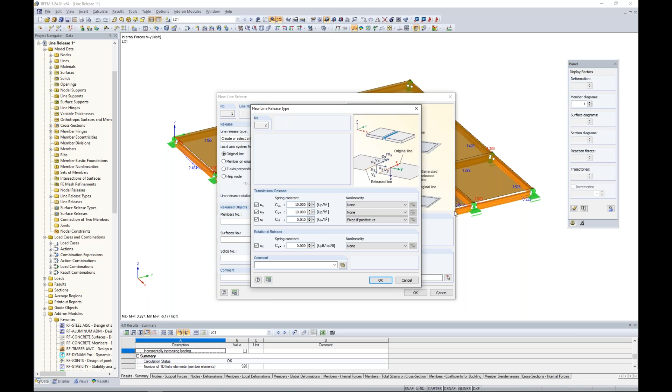So once we have created this line release type for all of these definitions between the member and the surface, I can click OK. I am going to release surface number 1. When I click OK, I have the ability here to highlight over the entire member. And what you'll see now is this symbol, which represents the line release, connecting all of these glulam members to my CLT panel.

So I rerun this calculation, and hopefully we'll see a little bit of a difference here with our results. Notice it's going to take just a split second longer because we've introduced this nonlinear behavior with these line releases. But we take a look at our torsion, well, it might still look like we have some torsion, but these are pretty small values, 0.04, 0.1. This is much, much lower than what we were seeing before because we've now released that behavior between those two elements.

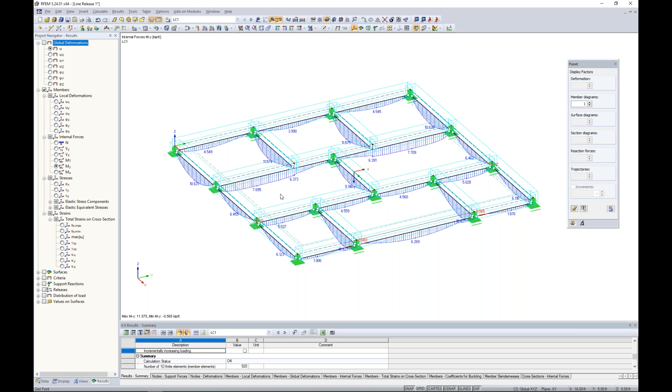If we take a look at our strong axis bending, we're no longer seeing those high peak negative bending forces either, which is exactly as you'd expect here. We have positive bending for all of our member elements. So some of these nonlinear applications can further be used in the program to really get the desired behavior that we want.